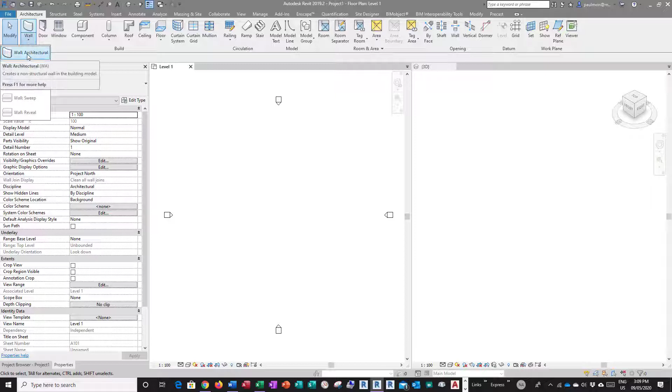First, I'm just going to draw some standard architectural wall. I'm going to select wall, drop down, select wall architectural, and choose the EIFS on metal stud, exterior EIFS on metal stud wall type. Just going to do a rectangular shape, and for unconnected height, I want it to be 8 meters high.

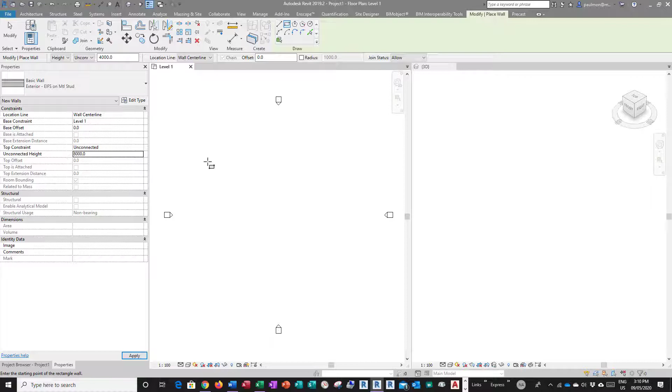So it'll be about a 2-story high wall, and I'm going to put a floor on the second level. I'll go to the Architectural tab and select floor, architectural, and choose maybe just a generic 400 millimeter. Just use the rectangular sketch tools and make sure its level is hosted on level 2.

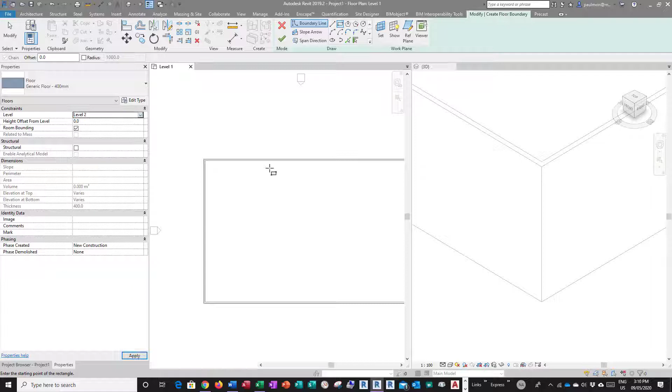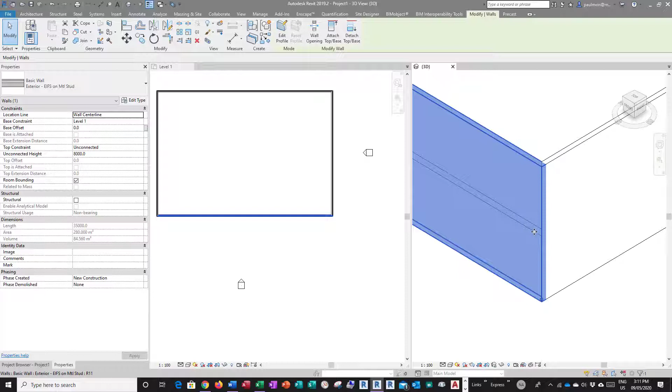I'm just going to pick and snap to the interior corner of these rectangular wall components, then snap the opposite corner. You can lock it down, but you don't have to since we're just doing this as a demonstration. If we go into this isometric view, we can see that the floor is in here, roughly around the midpoint of these walls.

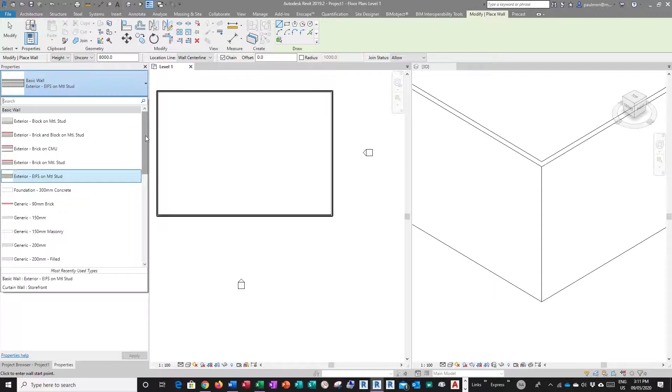Now I'm going to use curtain wall to try to create a corner window condition at the ground level here. I'll go to the wall tab again, select wall architectural, and choose from the drop down here, look for curtain wall and select storefront category. One thing you should double check before you do that is make sure it is automatically embedded. If we look at the properties and edit type property, make sure the automatically embedded toggle is on, otherwise it will not cut the wall when you place it in this exterior wall.

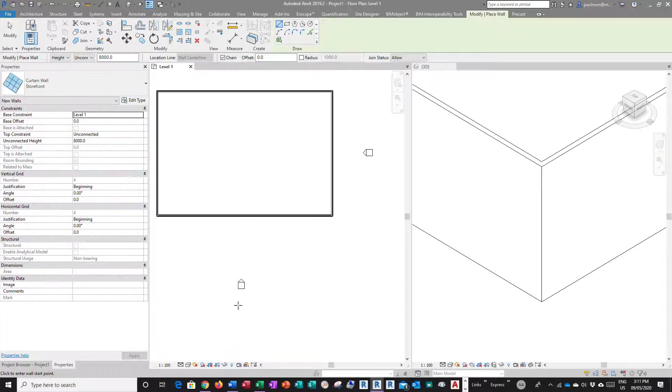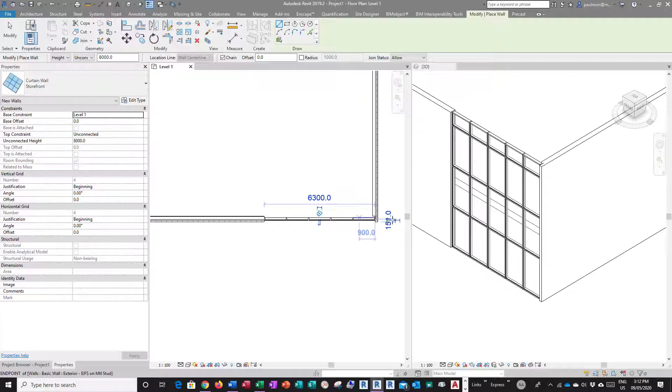I'm just going to zoom in here and pick to snap to the center line of this wall. Looks like it's snapping to the top. I'm going to hit my space bar so it'll toggle the exterior side to be at the bottom of the point I'm about to pick. So I'm going to pick at the intersection here. That's one wall. You can see it's cutting through the whole system, so I can just continue moving it up like this, drawing another wall section.

Now rather than making them the full 8 meter height, I'm going to change it to just 4 meters, and the same thing on this side here.

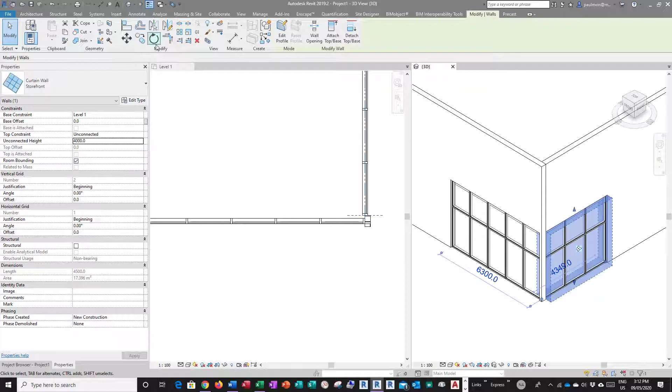Now let's try to trim the corner here with these curtain systems. I'll go back in here, use the trim the corner command, select the first wall, and select the second wall. It doesn't really work that way, so maybe we can just use the grip command.

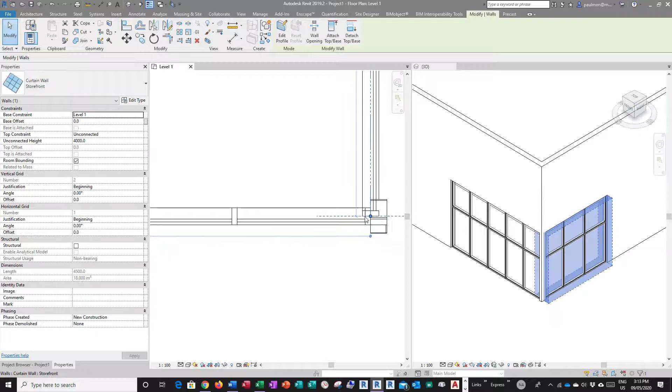It looks like the endpoint of the two curtain systems is meeting at the right location, but we still have a chunk of this wall left over. It doesn't give me a nice clean corner.

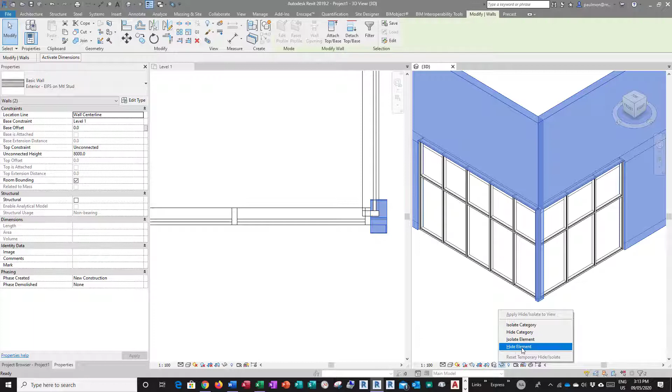Now before we clean up this corner, let's clean up the curtain system first. I'm just going to click on this wall, then hold down the Control key and click on the other wall. I'm going to use the temporary hide button with the eyeglasses here, hide elements, so I can see these two, the junction of these two curtain system panels.

I'm just going to put my mouse over one of the mullions and right mouse click, select mullion on grid line, selecting the mullion on this grid line on this curtain system. I'm going to unpin it, and delete it by clicking on the delete command up here at the modify panel, or I can hit delete from my keyboard to delete these two mullions.

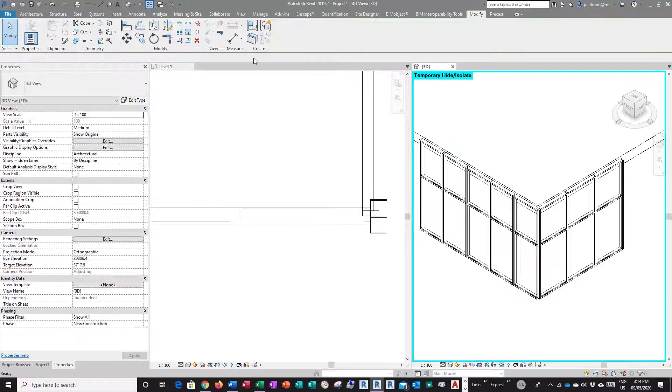Now I'm going to select these two mullions by putting my mouse over this mullion, then right mouse click, select mullions on grid lines. I'm going to unpin these two mullions so I can modify them, and go to the type selector and change it to quad mullion 1.

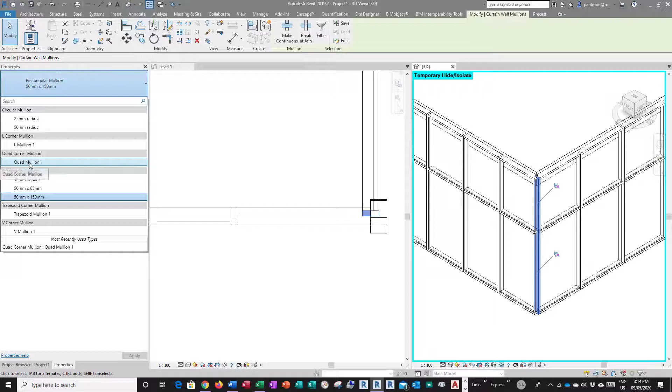So we have a corner mullion here. Looks like we may need to clean up this junction a little bit better. Yeah, it's cleaned up now.

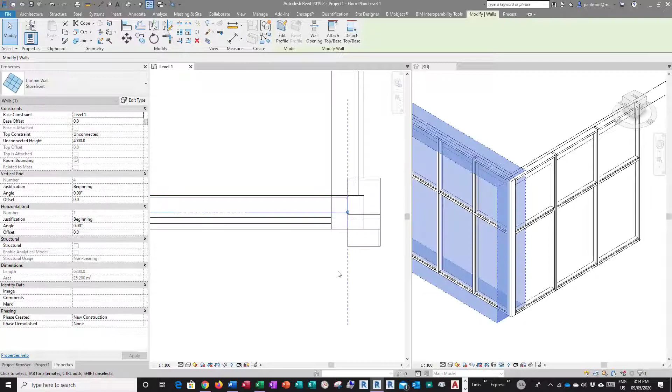Now we've got to clean up the wall. So if we unhide what we hid previously, reset temporary hide isolate, we'll see the wall, the chunk of wall is still going down here. The only way we can clean this up is by using wall profile or adding another wall opening in here. So I'm going to use wall profile.

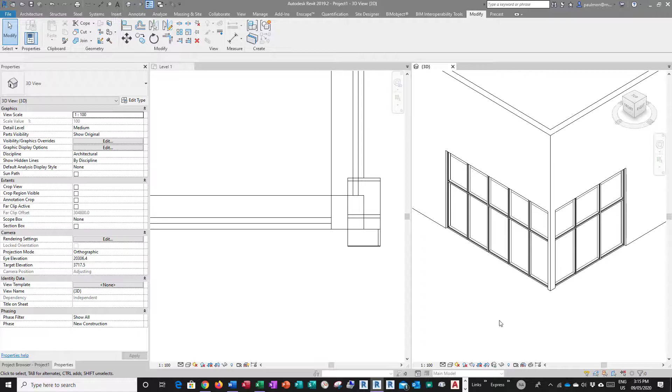Click on the wall and select edit profile. I'm going to click on the top of these curtain systems to create a sketch line, using the pick line method, picking at the top edge here. It will create a sketch line.

I'm going to pick another one on this side of the mullion here to create a sketch line so it can be locked to the curtain system. So if I change the curtain system size, that profile will be automatically updated.

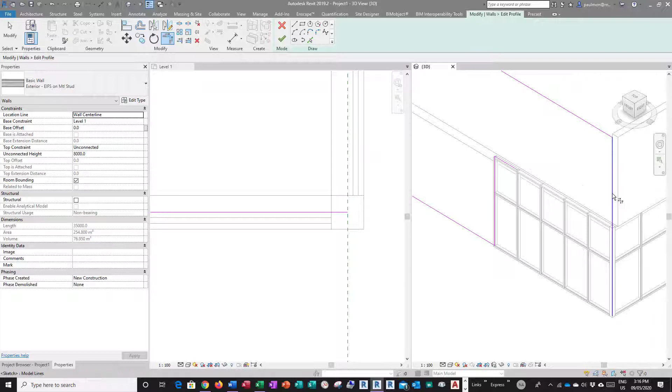Now I'm going to trim the corner to clean up these profile lines for the wall. So trim the corner to clean up this corner, trim to this to clean up this corner, and then trim to this. I'll select OK to finish this profile.

Now you can see you have a clean corner window junction.

Another way of creating a corner window condition is to create a custom window component with a 90-degree angle. The opening will only be along the longest side of the window, and on this other side we have to create a special opening or profile on the wall to make this work. So we load this window family into our project.

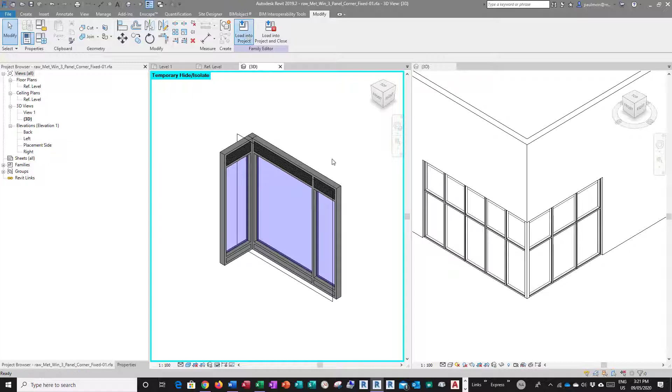We're going to toggle to the level 2 floor plan, change this back to hidden line mode, and look at it from medium level detail. In this plan view, we want to turn off the underlay, so underlay we're just going to select none.

Now we're going to place that L-shaped window family. We go down to the window category in the project browser, and this is the one that we have. We're going to use this option, 960 by 2500. I'm just going to put it out here.

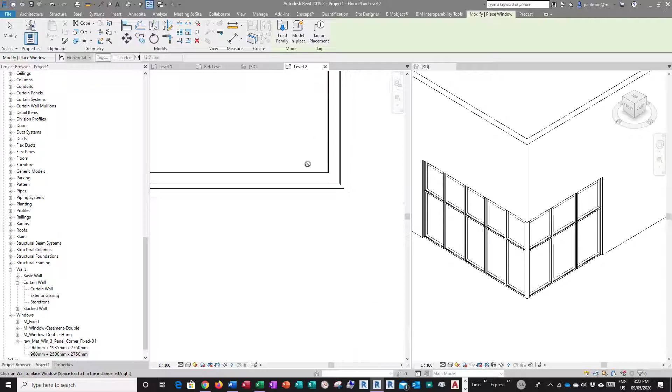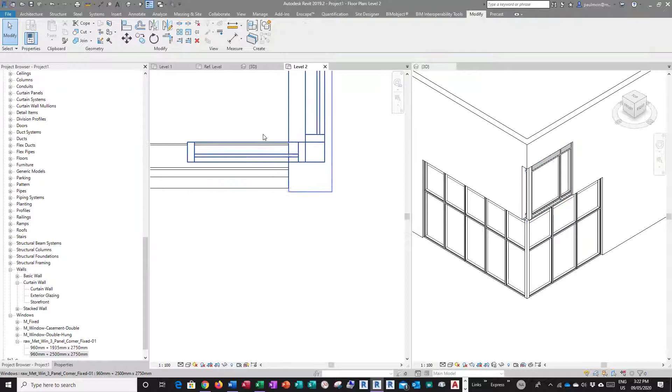Now I'm just going to place it in this wall, and I'm going to flip this over, then move it back into the wall this way. Maybe a little bit further down. Maybe something like this. Now I'm going to profile this wall.

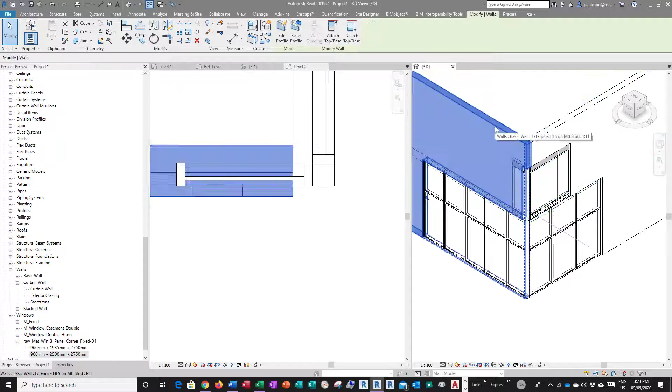I'm going to click in here, select this wall, and then select Edit Profile. I'm going to pick the top of the window here to create a new profile and also lock to it, so if the window size changes, the profile will also change with the window. Then I'm going to pick the other edge and use trim to corner.

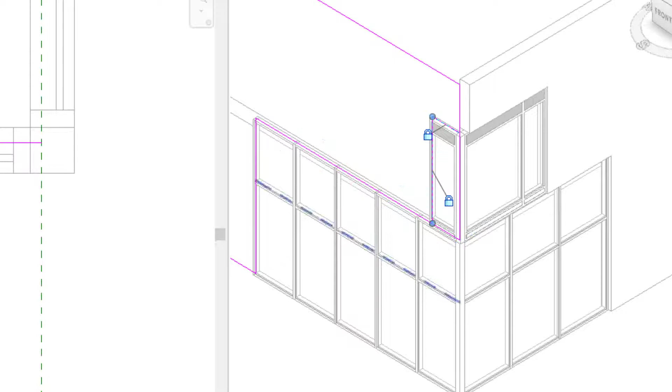Make sure you click on the lock button to lock that sketch line to the edge of the window. We're going to use the trim to corner command to clean up these sketch lines. I'm going to click the green check mark to finish, and now we have another corner window.

Another way to create a window corner condition is with this specialized window family that has the opening project beyond the frame of the window, so that it will clean up the wall junction and we don't have to edit the profile of the wall to do the cleanup. Let's take a look at how this is done.

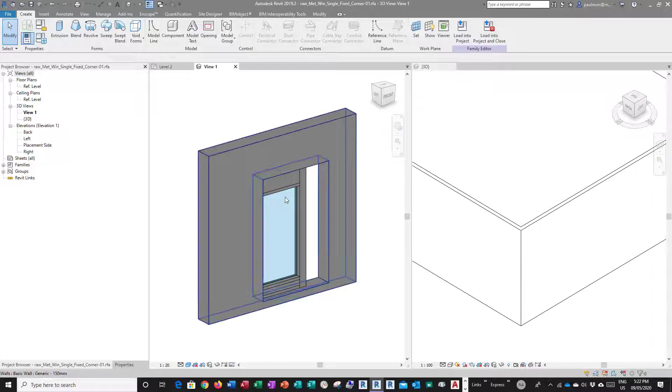I'm just going to load this family into the project file by clicking load into project, and toggle to the level 2 floor plan. We are here already, so if I click on this wall, it's showing that this is the wall. We're looking at this corner from this angle here.

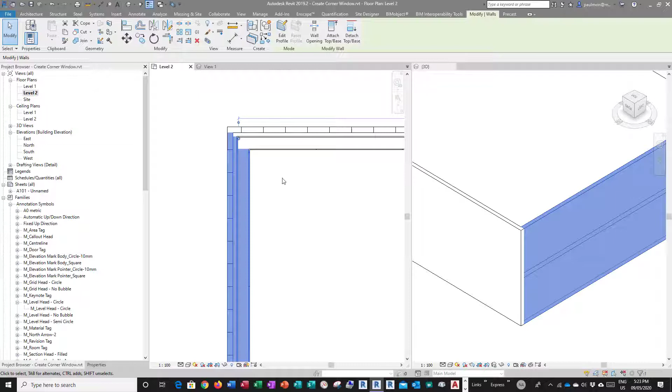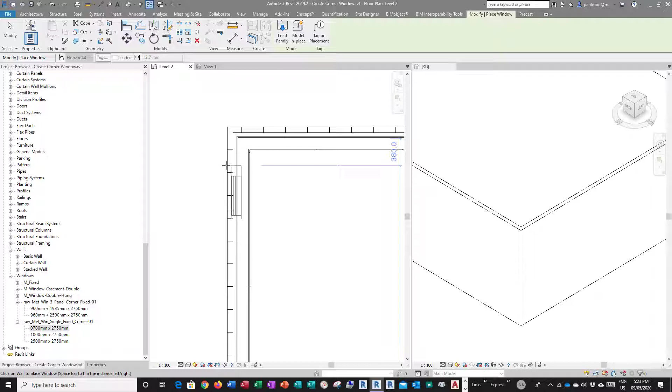I'm just going to go back, scroll down to the project browser, look for this window family, and drag this type, 700 by 2750, and place it over here for now, maybe this way, so the exterior orientation is lined up with the orientation of the wall.

Place it in here right now, and I'm going to use a dimension to constrain the window from the face of the wall to the edge of this window, and I'm going to change this to be 50.

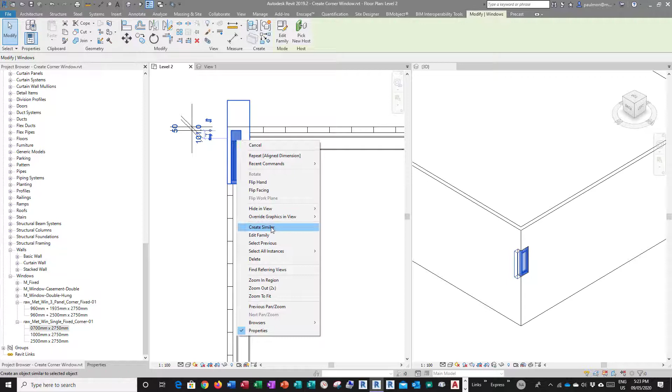I'm going to click on this window family, right mouse, and create similar. I'm going to put another one here, and flip this over.

I'm going to use the align command to align this edge with the edge of the mullion. Now you can see the two mullions are directly on top of each other, so you cannot tell whether it is one or two mullions. It cleaned up perfectly.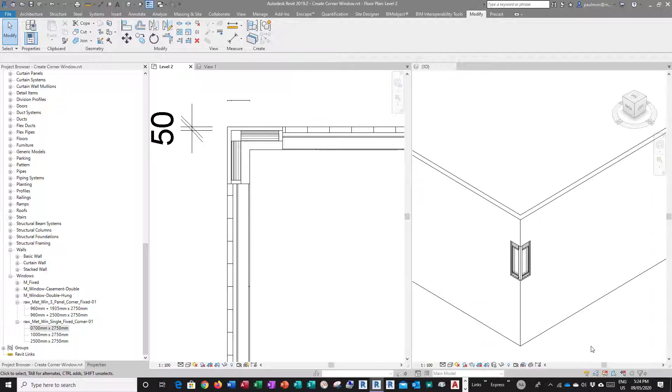You can see the blue line indicating the wall opening projects beyond the frame of the window actually did the cleanup, so you don't have any leftover bit of the wall residual on the outside corner of these window mullions. Now we can also go back and change the type.

So if I go in here, this is a 700mm wide module. If I change it to a 1000mm wide, click in here and change the type.

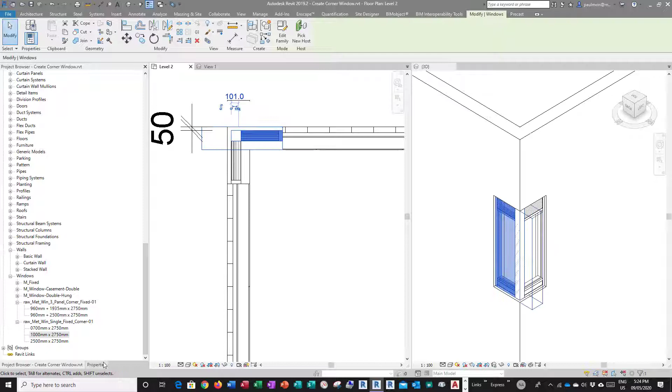You can see that you can mix and match different lengths and different styles of windows between the two types. So if I click on this one and change it to the largest one, 2500, I have a nice large window on this side and a smaller one on this segment.

So ultimately, I think this will be a more flexible approach to create corner windows.